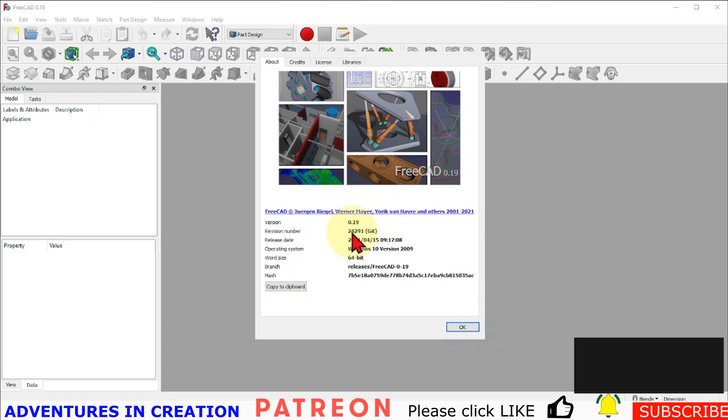So first things first, we are going to show you which version of FreeCAD we have. It's actually version 0.19.2, the very latest one downloaded. It's the GIT 24291. I just re-downloaded it just to make sure that I have the very latest. So we're going to start.

If you have my macro, my startup macro, you can certainly use that. I'm not going to use that because some people complain that they don't have it, so we're going to do it manually. So we'll click that. We start a file. I'm going to save that file. I'm going to save it as, I'm just going to call this parametric design.

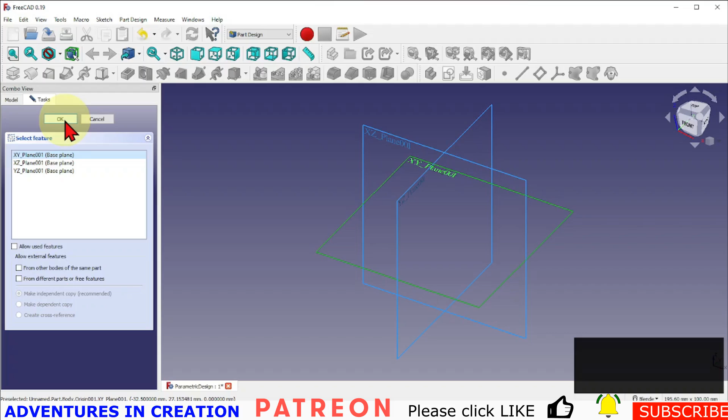You can use any plane you like and you can move it around. When you put it in the slicer, you can change it. It's entirely up to you, but that's the one I use. So if you want to follow me, use the XY plane. And then all I'm going to do is I'm going to rough out the shape. So I'm going to use this tool. This is the Polyline sketch tool. And I'm just going to sketch out roughly how this thing looks.

So it's going to be something like this. It's going to go across here, it'll go up here, there'll be a little step there, that'll come in here, and like I said, I'm just going to rough it out. And I'm going to do the same things with this that I always do. So I'm going to rough out the shape and just right click to get rid of the end of that polyline. I can drag this around a little bit if I want to, whatever we want to do.

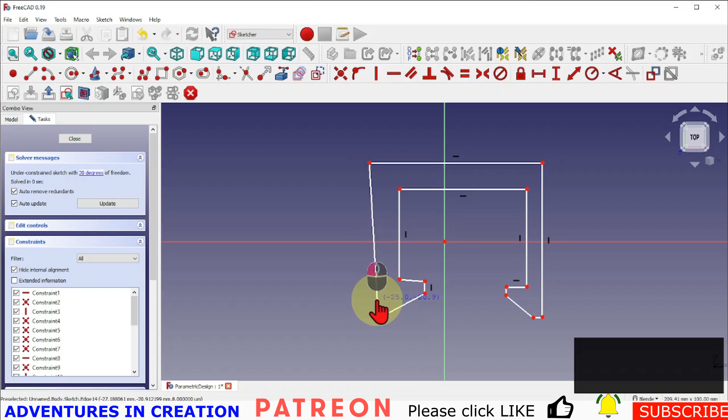Obviously, I'm going to take care of the geometry first, so I'm going to make those vertical. Actually, if I make this one and this one symmetrical around this line, and then you see when it pulls things out of shape like that, some people panic. There's no need to panic. So all we're going to do is we're going to hit that guy, make that go vertical, and then let's just move these out. We're going to say this one and this one are equal.

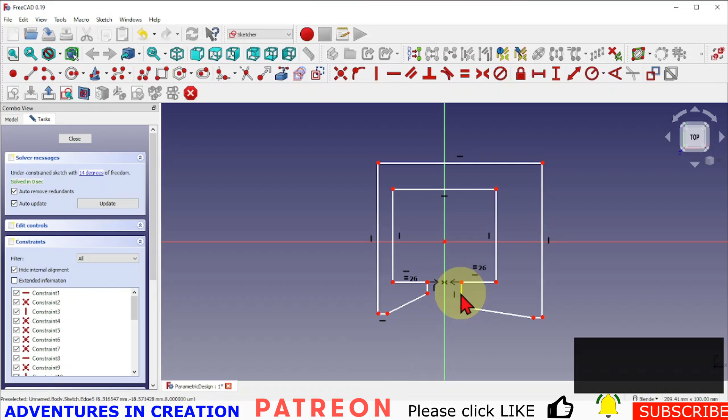And we're going to say this one is horizontal. And of course we want this one and this one to be equal. And we're going to make this one and this one be equal. And we're going to make this one and this one symmetrical. And we'll make this one and this one symmetrical. So now we have these things pretty much the same.

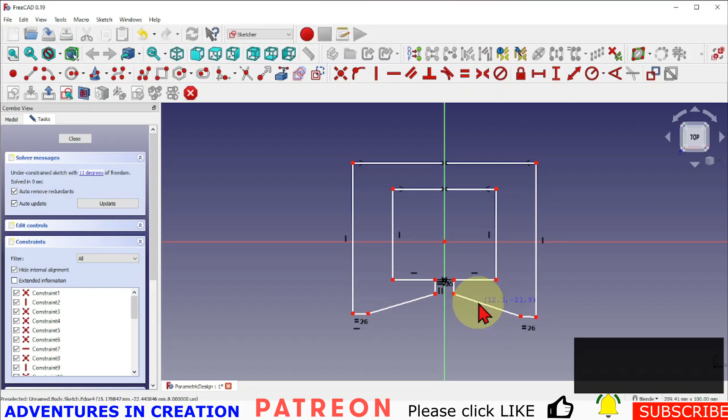So that one has to be horizontal. So once we have this shape, our geometry is pretty much locked in. Now we can start dimensioning what's important. So obviously the clip is going to hold something inside this space here. So this dimension is quite important. So we're going to take that one there and we'll give that a dimension because that's going to be important. And we're going to take that one there and give that a dimension because that's going to be important too.

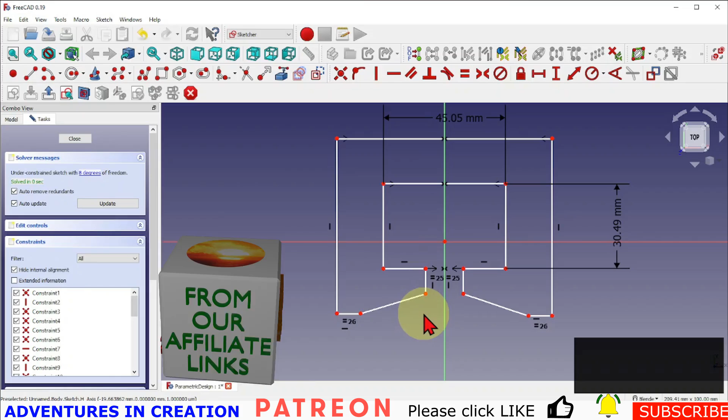Now I'm not going to actually give them numbers because remember we're going to make those parametric. So that's going to be my width and my height of whatever it is I'm holding, plus a clearance or however big you want to make the clip.

Then of course this piece here is going to be important because that's how much it's going to overhang. How much are we clipping in there? Obviously if I have something this big, I can't push it through there. I'll break this thing to try and do that. You can tell that just by the size of it. So we're going to fix that.

So what we're going to do is we're going to pick out the pieces that we need to dimension. And I think this height here is going to be important. So let's give that a dimension. And probably this one here is going to be important. So we're going to give that a dimension. And what else? So I guess the overall height and the overall width are going to be important. So we're going to give those dimensions.

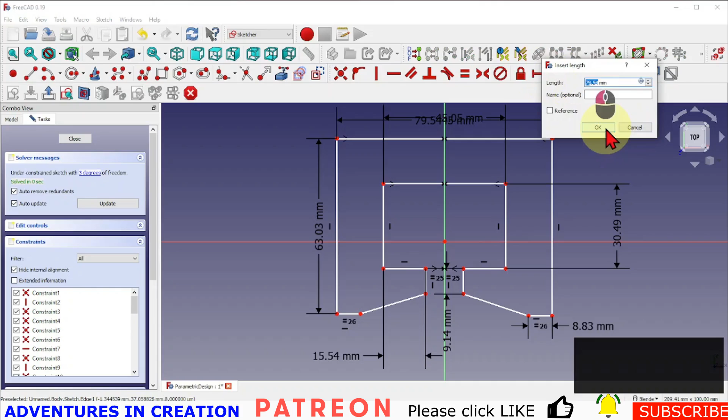And I still have 3 degrees of freedom. We want it to be a fully constrained sketch. So it's important that we constrain everything. Let's have a look at our degrees of freedom. Yep, it is showing everything is not constrained because we don't have it constrained to this guy here yet. So we want to do that. We'll move all this down.

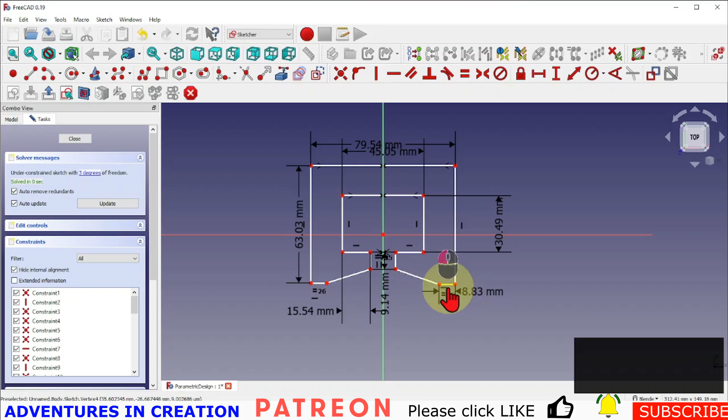I need that one and that one to be horizontally attached as well, so that they go up and down together. These go up and down together. And what we're going to do is we're going to make this and this horizontally aligned. And there you can see that piece is already attached.

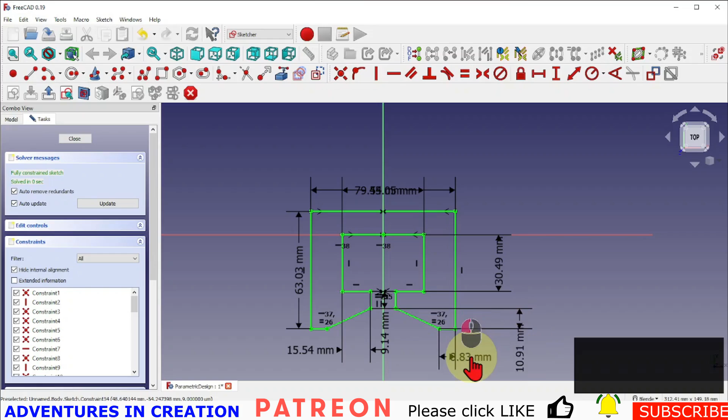Now what we need to do is just make a dimension that goes across here. So we want a dimension from here to here this way, and that will give us our fully constrained piece. I'm going to move these dimensions around so I can see them a little better. So we have a dimension that goes that way, that way, that way.

And so that gives us that overall height because we have this height and this height, just making up this piece. We have this height and we have this overall height. So I think we have enough to be able to create something parametrically from this.

All right, so now what we're going to do is we're going to say close for that. And I'm just going to pad it so we can see what the model looks like. I'll leave it at 10. This is basically the model. I'm going to put 2 holes in here, but first I'm going to put the parametrics on the outside of this to give it some reasonable dimensions. So let's do that.

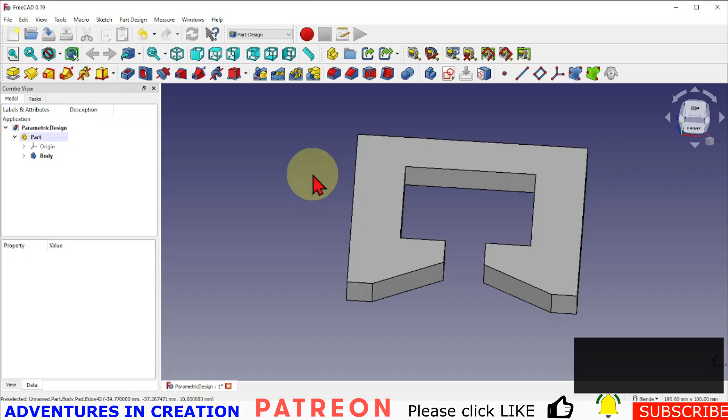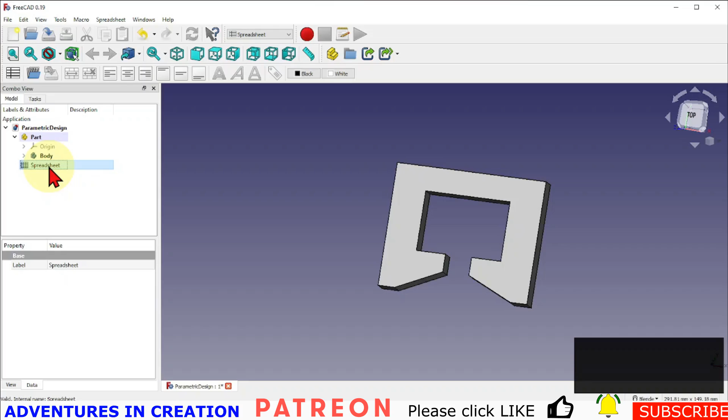And I'm just going to do it from a spreadsheet. So we could do a master sketch, but I'm not going to do a master sketch in this case. I'm going to do a spreadsheet, and we will put together the parametric data that we need to make this a parametric model. So first thing we have to do is switch workbenches to the spreadsheet workbench, create a new spreadsheet, and then we can open up that spreadsheet just by double clicking it.

And of course we can tile those two so I can see this and this. And now I'm going to go back into my sketch. So now I can see my sketch alongside my spreadsheet, and we can now put in the dimensions that we want. So what I like to do is to give dimensions some kind of descriptive name. So we're going to do that.

And I'm going to manually create the aliases. There is a macro. Again, I have a macro that does that. It's called Easy Alias. What I'm going to do is I'm going to do it manually so you can see how we do that. So the first thing I'm going to have is the overall width and the overall height. So that would be this one and this one.

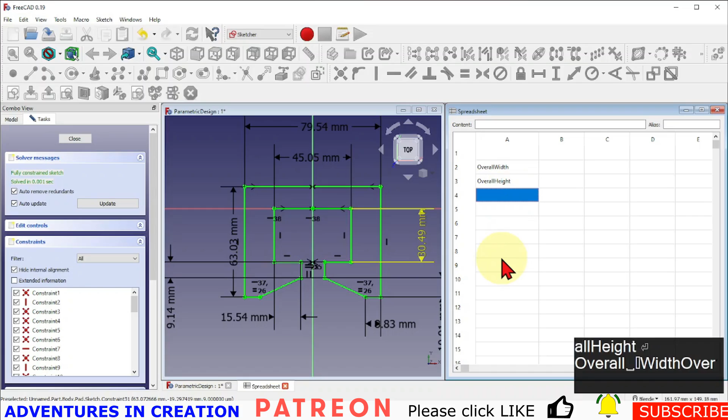And then the inside width and inside height, which are the two important ones for me. So I'm just going to call it inside width and inside height. And those two are going to be the primary drivers for everything else. If you think about it, these are two dimensions that I really care about. The outside is really just a function of the thickness around this. This overhang is a function of how much I can have it overlap, hold it in there, and not have too small of a gap here.

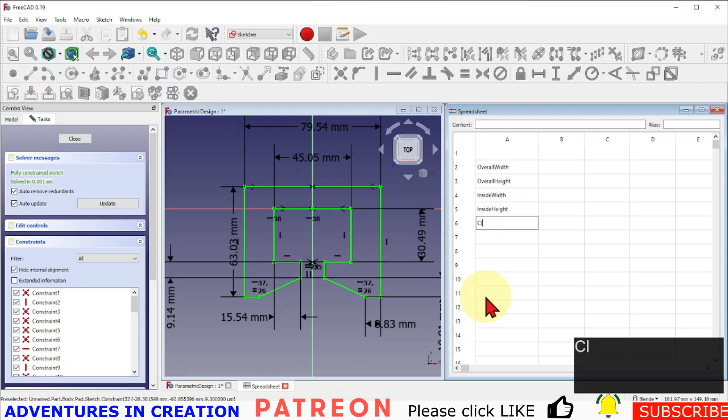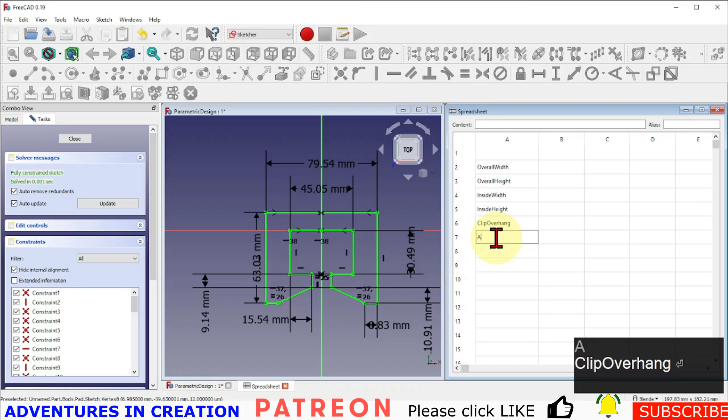The other pieces that we have, we've been calling this the overhang, so we're going to call that the clip overhang. And this dimension here, we'll call this the angle height. And again, it's up to you what you call your stuff. Whatever makes sense to you. It's not important what it is, as long as you know what those dimensions refer to.

So I'm going to call this the clip flat height. So that's the flat of the clip. This is the overhang of the clip. This is the angle height. This one and this one could probably be equal, to be honest with you. Normally when I do these type of clips, those are roughly the same height, so maybe we make those the same. And then what else do I need? I think that is it for now. So let's get started with those.

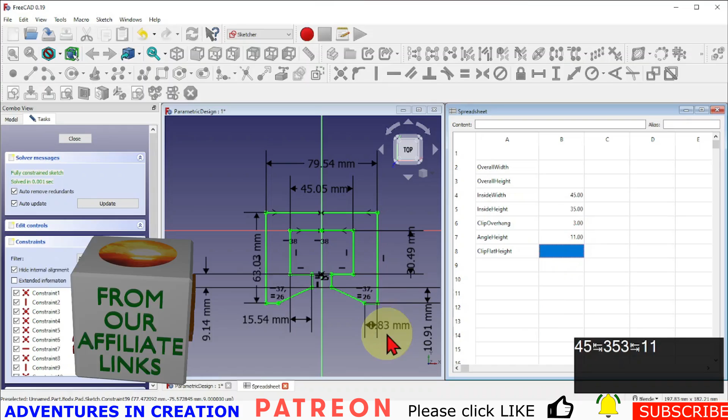So my inside width is going to be, and I'm just going to come up with a dimension, for now 45, and my inside height, I'm going to make it 35. And my clip overhang probably only needs to be about 3. My angle height is currently 10, so let's go with 11. And my flat height in this particular instance is 9. And again, I'm just picking dimensions just to be able to assign them.

And now if I look at my overall height, it is actually my inside height plus my clip flat height, my angle height, and then whatever that thickness is going to be. I can make that thickness the difference between this and this divided by 2. That would keep a constant thickness all the way around. So let's try and express that as a calculation. As with all spreadsheets, you just say equals.

And it's going to be the inside height, which is B5. So B here, 5 here is this number. And then I'm going to add the angle height, which is B7, and the clip flat height, which is B8. Plus, it's going to be the inside width, actually the overall width, so B2. I'm going to put this in parens: B2 minus inside width, which is B4, divided by 2.

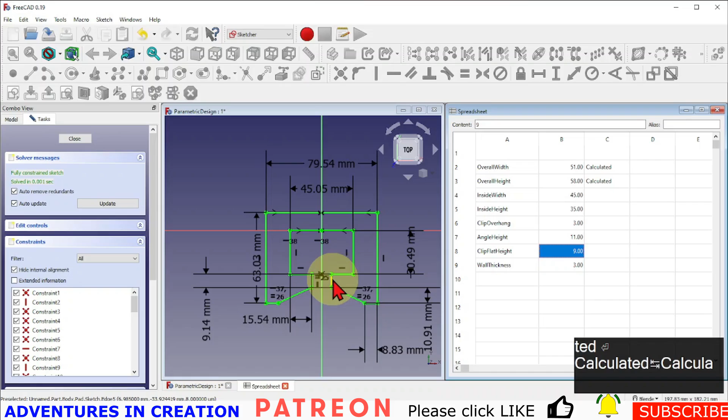This clip overhang, can we calculate that? Let's have a think about that. I don't think we can. I think we're going to leave that one. The angle height, we're going to leave that one. The clip flat height, we'll leave that one for now. So I think we're ready to assign some things here. So what we're going to do is we'll click on that. We'll go to this where it says alias on the right hand side. And I'm just going to give it the same name as this. So overall width.

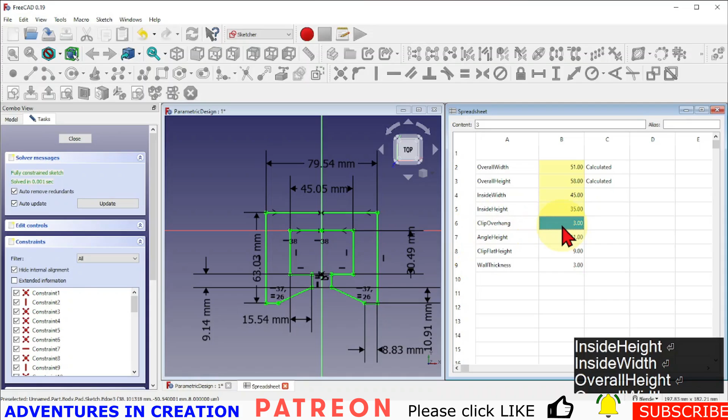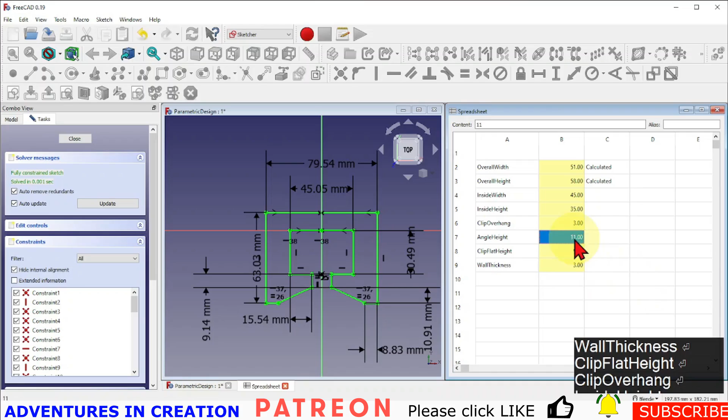I'm going to do the same for this one. Overall height. And inside width. Inside height. Now the easy alias, if you select that, it will automatically give it those names, but I'm doing it manually so you can see how to do it. Clip overhang. So I just select the number and I'm going to type in whatever's there. Clip flat height. And wall thickness. I did do 2 S's. Oh, I missed off angle height, so I got to do that one.

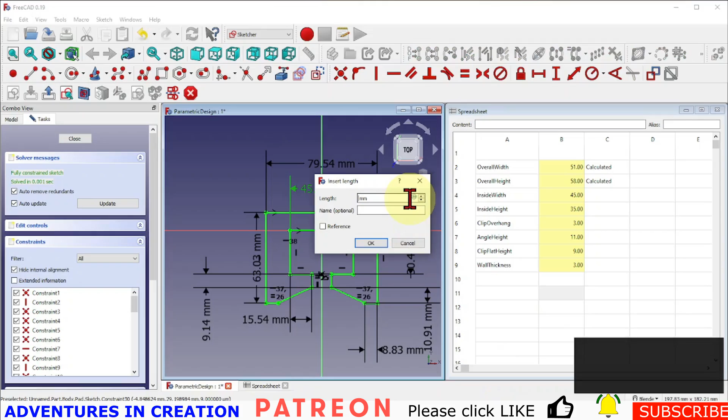And that gives them all names, so that has the same name as what's in here. So I can easily see when I go through these which one's which. And now it's just a matter of assigning them to here. So if I go here, double click that, then I click on this little guy here. So let's see, can I zoom into there? Wait. Okay, let's try it again. I'll just zoom in there. There you go. So you see this little guy here.

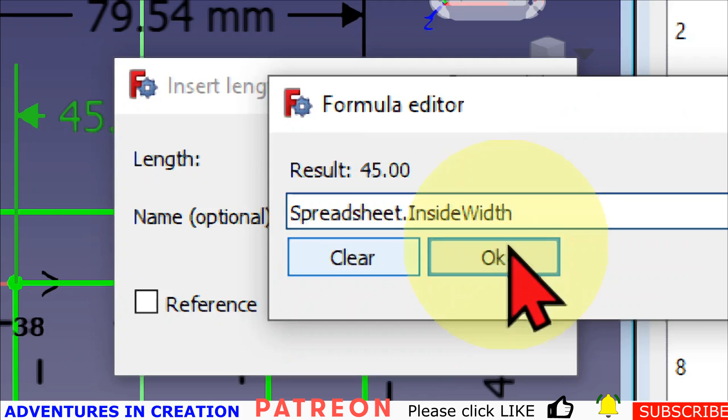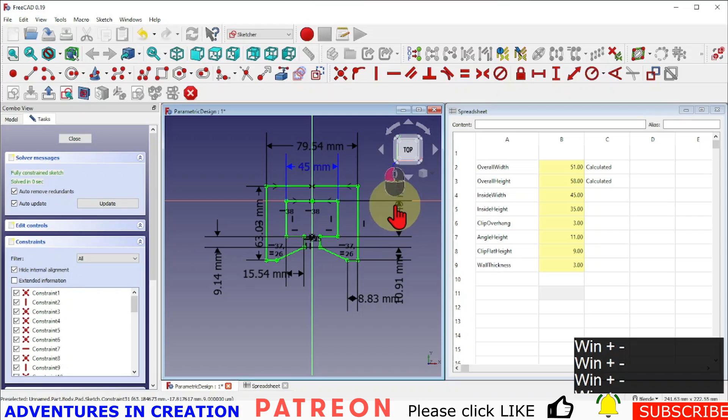Now if I click that, it'll let me say spreadsheet, and then I'm gonna give it this inside width. You can see it automatically tells me the result. I say okay, click okay there, and now I'll just zoom back out. So now you can see that it's turned blue, which basically means it has been assigned a dimension. So it is now whatever this dimension is. And we're going to carry on.

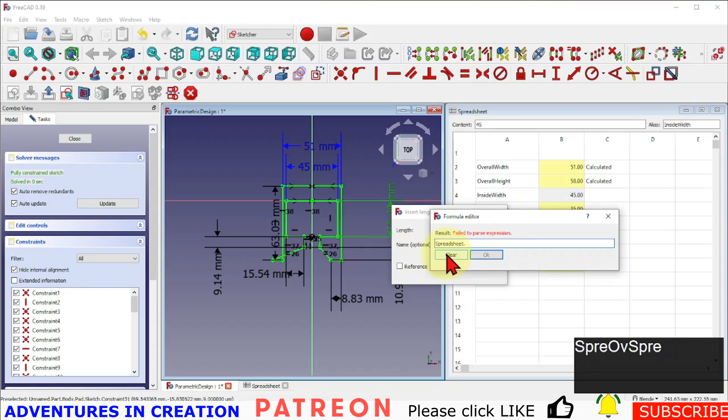So this one's going to be the overall width. So I double click it, hit that little strange guy again, spreadsheet, overall width, and you can see it's already changing to the things that we have set. And I'm going to change this one, double click, that guy, spreadsheet, inside, and this one's inside height. And then I'm going to change.

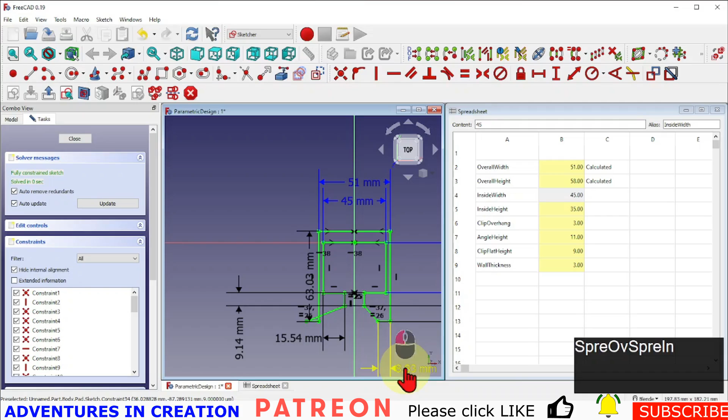Now, one thing to notice, you see how this thing is turned inside out? That's not a great thing to happen. So to fix that, I might have to mess with some of the dimensions here. I might have to delete a dimension or something like that to get that to work again. So I'm going to assign this one spreadsheet, and it's clip flat height. And this one is going to be the same thing. So I made those equal.

And somebody asked me, can I have more than one body reference these dimensions? And yes, you can, because the spreadsheet is accessible to everybody. So clip flat height. Say okay. And now that's 9. This guy is the same as this guy, but for some reason we are flipped. So we're going to have to fix that, and I'll show you how. Actually, it's not a bad thing that that's happened, because that will let me show you how I fix it.

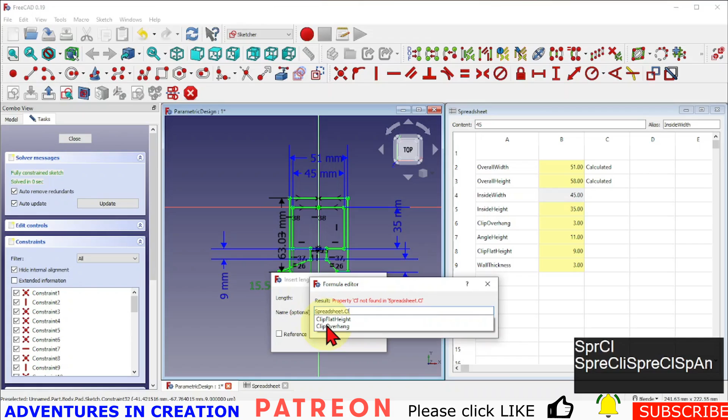So we're going here, spreadsheet, and that's going to be angle height. And then this one is going to be clip overhang. So spreadsheet, clip overhang. And this one is going to be spreadsheet, overall height.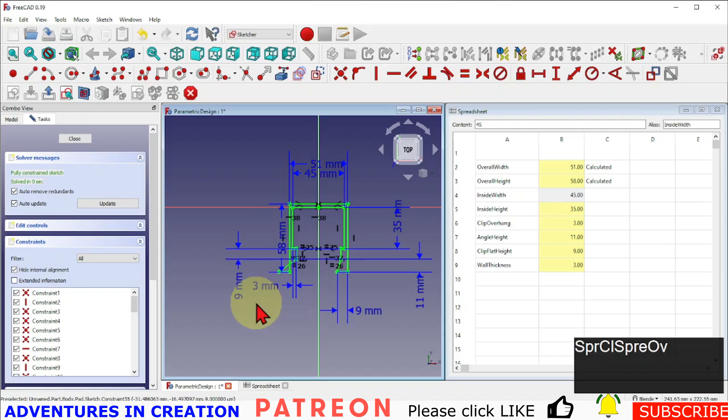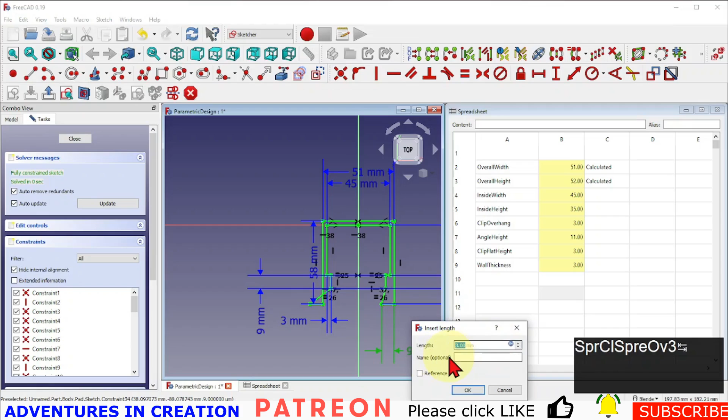And there we have it. So now I have a 3mm thickness there. You can see that things are not lining up the way I'd want them to. So clearly this clip flat height shouldn't be as big as it is. So if I change that, we'll see here that this is updated. I thought this was clip flat height as well. Let me just double check. So if you want to see which ones they are, it is, but it hasn't updated.

There we go. And now if I look at my model, I can see that there are some issues, and I can see that maybe I need to make some things proportional. In doing so, it'll mean that these things will calculate themselves. So I'm looking at that right now. Like I said, I haven't done this yet, so we're doing this together, so I can show you how I do it. And I do have to fix this. Why would this go inside out? It's because it flipped inside out before the dimension was applied.

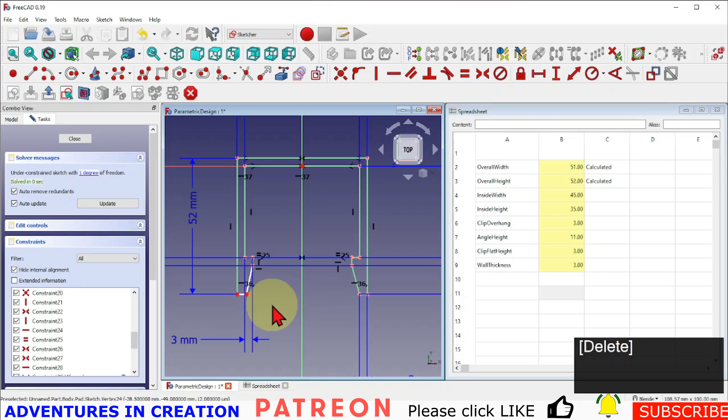So what I'm going to do is break this constraint here, number 26. So I go down on this left side and I turn off 26. That should not be holding anymore. Actually, I'm going to delete it. There we go. So it didn't update for some reason. Now I can turn that back to where it needs to go.

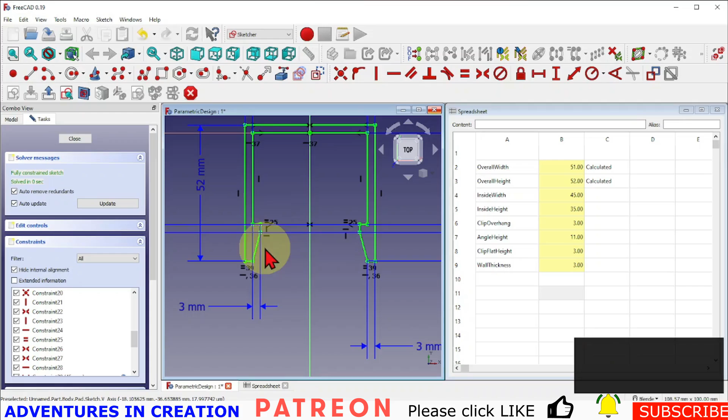So that is now, I can add that back in, I think. Just add that back in and we should be good. That was just an equal constraint. And now it's back in the right way. But we can see that we need to do some things here to make this different. So my overhang should maybe be 5 in this case.

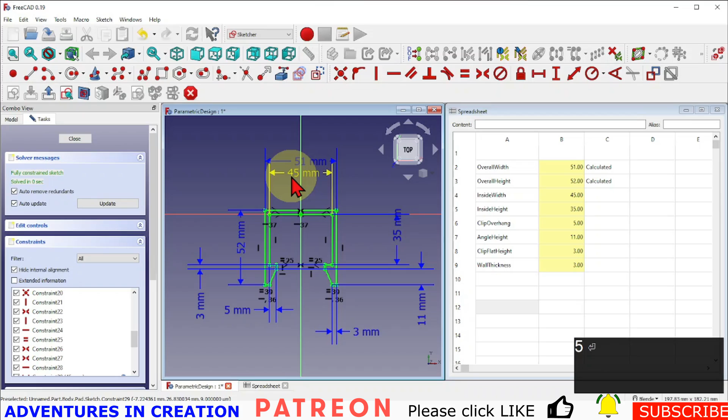And you can see sometimes it's not updating. So if I double click on the dimension to edit that, you see it is already 5. And when I say okay, now it will update. So that's kind of weird. So probably what we want to do is make this clip overhang proportional to this inside dimension. So I'm looking at it to see, is 5 enough? Do I want to go more than 5? And give me an idea of what the proportion should be. Right now that inside is 45.

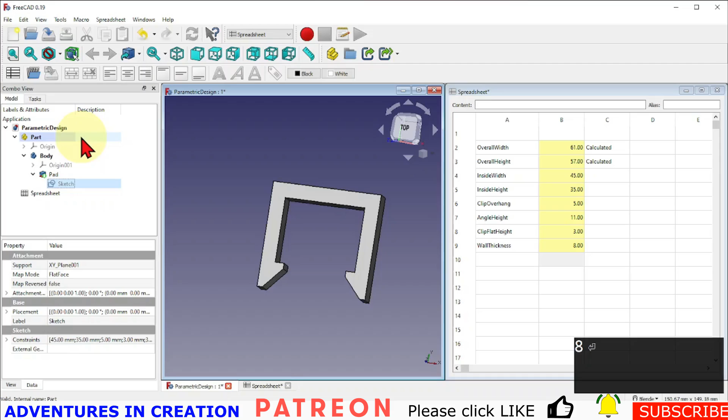And we're also only 3 in our wall thickness. So let's make that 8, just to give it what we need here. And so everything updated in our spreadsheet. And what I'm going to do is just save everything. Save my parametric design. I'm doing that because I want to make sure that I don't lose anything with the changes here. I close my sketch, reopen my sketch, and now all my dimensions are correct.

So now it's starting to look a little bit more proportional, a little bit more the way I want it to be, with an 8 wall thickness. So again, we could make that a calculation and use it as a proportion. I'm thinking out loud. I'm doing this with you right now. I have not already done this, so I'm considering the design as we go, so you can see how I think about it. I don't mind that these are the same. I think that's pretty good. I think this needs to be a proportion of this thickness though. And right now it's just under half of that.

So if I say that's 4, again, I'm just looking at what it looks like proportionally. If I make that 4, it makes everything 4. So if I make that half of that, I'm now going to say this one equals the wall thickness divided by 2. So that's B9 divided by 2. So now whatever the wall thickness is, and I'm going to put my Calculated alongside here, my clip flat height is going to be half of that. So I think that is good.

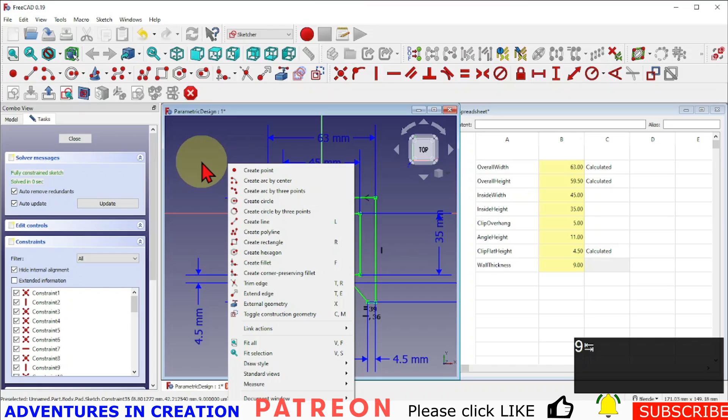I'll come back. Okay, so working through our dimensions then, I think this wall thickness could actually be calculated based on what looks about right. I have 1/5 of this inside width is my wall thickness. So let's try that, we'll change the dimensions around and see what it looks like. So my wall thickness is B4 divided by 5. And I'm going to make this calculated.

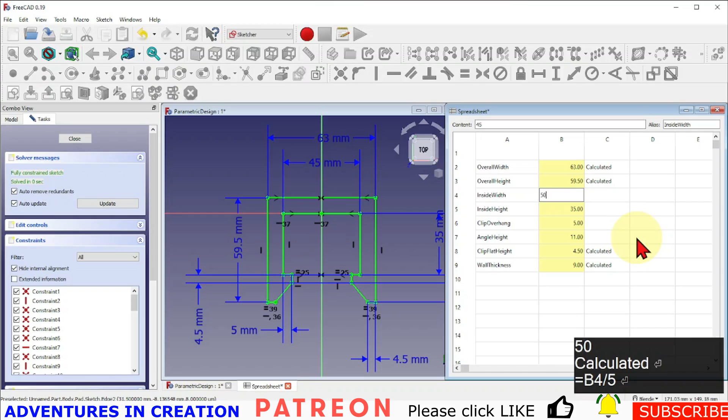So now if I change my inside width to 50, I'll make that wall thickness 10. I still don't know why my dimensions are not updating themselves. I did look at the settings, I couldn't find anything. I'm not sure why it's not updating as I'm changing them here. So now if you look at, it's automatically making that wall thickness. So all I'm doing is setting my inside width and my inside height and my clip overhang and my angle height. And now if I change my angle height,

I think my angle height there is a little bit extreme. So I'm going to have a quick look. See, we have 11 millimeters right now. I change that to, let's go to 9. Just going to do a save again. I just want to save everything, make sure I don't lose it. You should be saving stuff regularly.

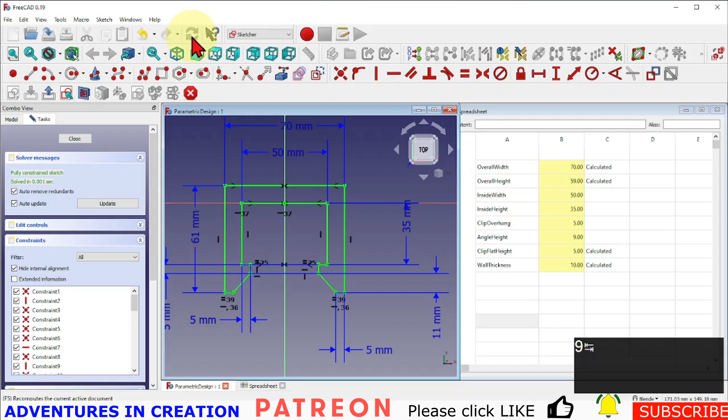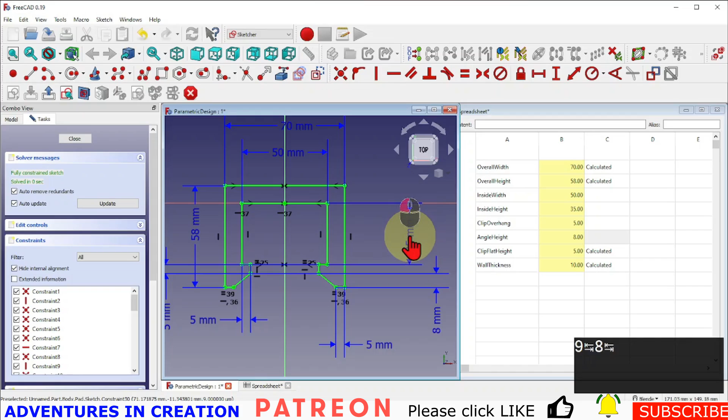Normally I would say there would be a recompute that would allow that to change, but I don't know why it's not. I don't know if it's just this particular session, but it's not changing. And I think I'm going to even go smaller than that. I might go 8. I think that looks a bit better. And if I look at this dimension, so as a proportion, we could say 40, just to see how that looks. Everything should be able to update there. So I think that looks good.

If I make that 1/5 of that, so I'm going to do the same for that. So that's going to be my inside height, B5 divided by 5. Oops. We have to say equals B5 divided by 5. There we go. I'm going to call that calculated.

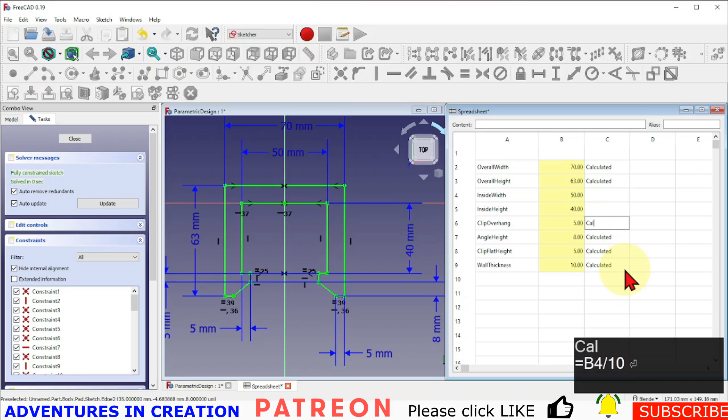So now if I change just these two, I'm changing everything except the clip overhang. So I think I want to go with the clip overhang too, and that is 50 to 5, so it's 1/10 of that. So let's make the clip overhang equal B4 divided by 10. And now that's calculated. So you can see how it came about, my calculations here to be able to make everything parametric except these two pieces that I want to set up.

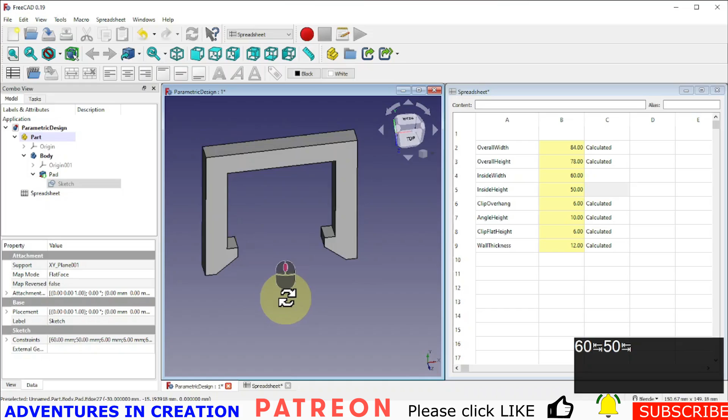So what I'm going to do is I'm going to save that right now. Save my design. And now I'm going to just make my design my model and take a look at it. And now, one more time, I'm going to tile my windows, and I'm going to change this inside width to be 60. And I'm going to change my inside height to be 50. And there you can see it's fully parametric. Everything is changing based on my inside height and inside width.

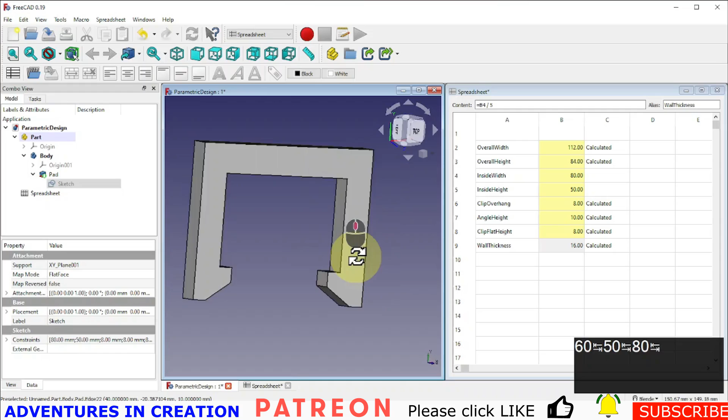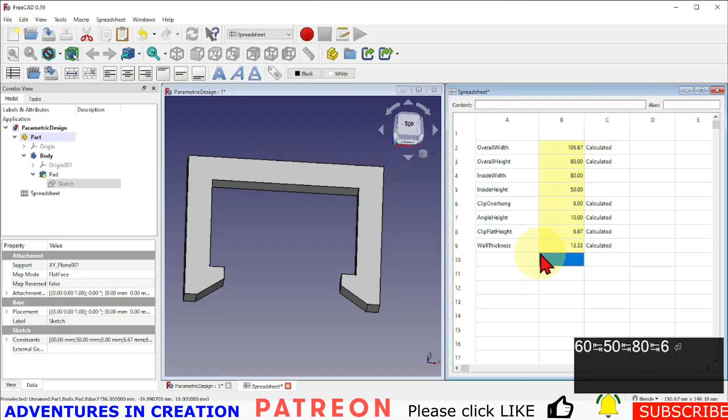And my wall thickness now is 12. I don't know if that's going to be too thick for what I need. So I might change that calculation. So let's go with 80 for my inside width. Yeah, now I'm getting too thick. So I don't like that calculation. So it's 1/5 of my inside width. And I think it could be smaller. Let's go 1/6 of my inside width. Maybe 1/8 my inside width. Yeah, that's probably better.

So that is 10, and we know this is 10 because that's what we originally set it up to be. However, we could make our height there, what do we call that? Our extruded height, and we could make that a calculation based on our wall thickness. So we could say maybe we want it to be 1.5 times our wall thickness, so B9 times 1.5.

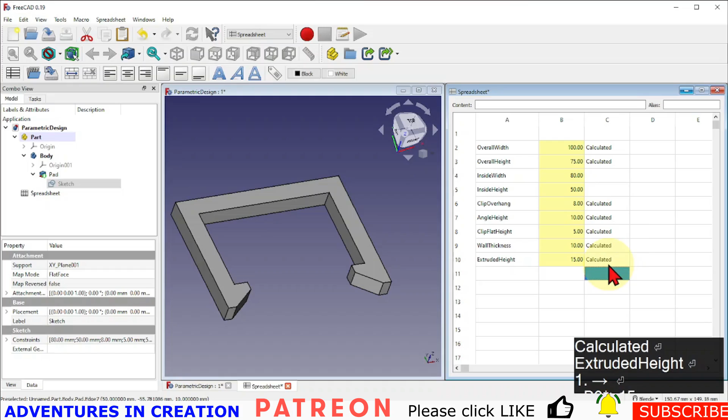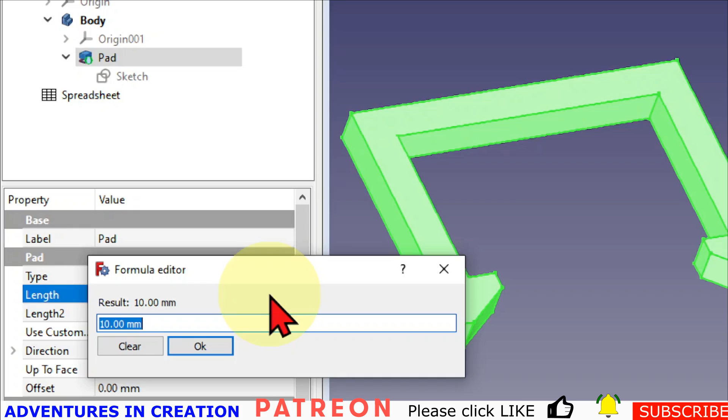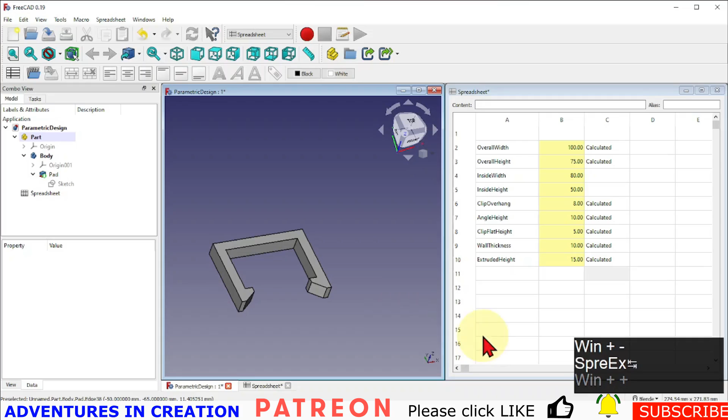So let's go over there a little bit. So where we have our length of 10, we hit this, and we say it's equal to spreadsheet extruded height, and just tab away from that. And now we have that all parametric too. So I like that so far. So I'm going to save everything. And then we'll look at putting holes in.

So now what we want to do is we're going to add 2 holes in here. We want to make those parametric too, so they're proportional to the size of our clip. So I'm going to do that. We're going to go back into part design, and we're going to create a new sketch. And this time we want it to be on this plane here, the XZ plane. Say OK. I'll go over here, turn my model back on so I can see what I'm doing there.

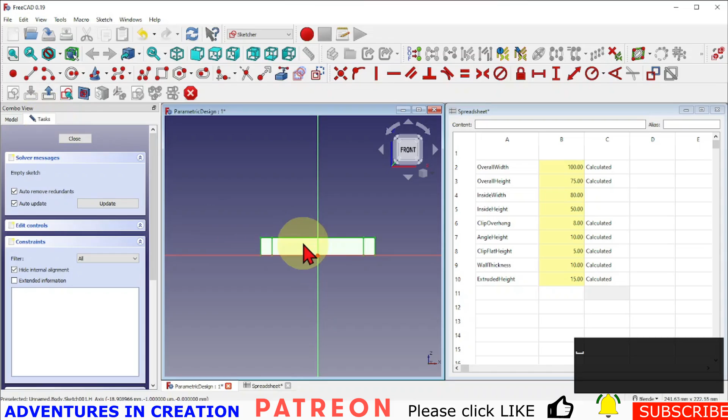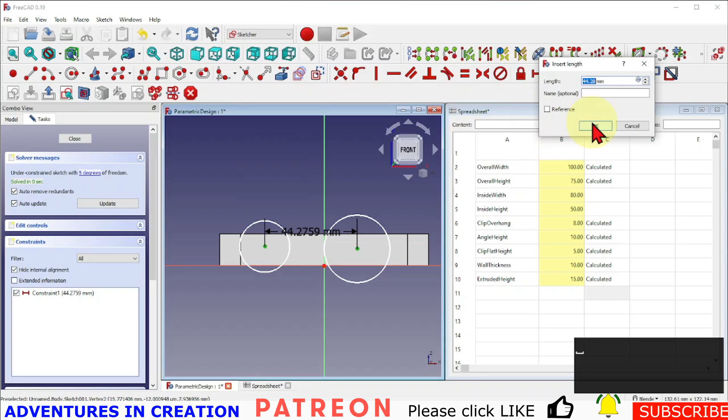And we'll just zoom in here. We're actually just going to put 2 holes in. So I'm just going to take this, pop 2 holes in here. Doesn't matter where they go for now. Remember, everything's parametric, so it really doesn't matter where we put them to start with. We know there's going to be a dimension between the 2 of them. We know that this one and this one are going to be equal.

We know that this one and this are going to be symmetrical. And then we want a diameter on one of these. Again, it doesn't matter what we put there for now because we're going to make it parametric. And then we just need to align it from this point up. It has to have an alignment that way.

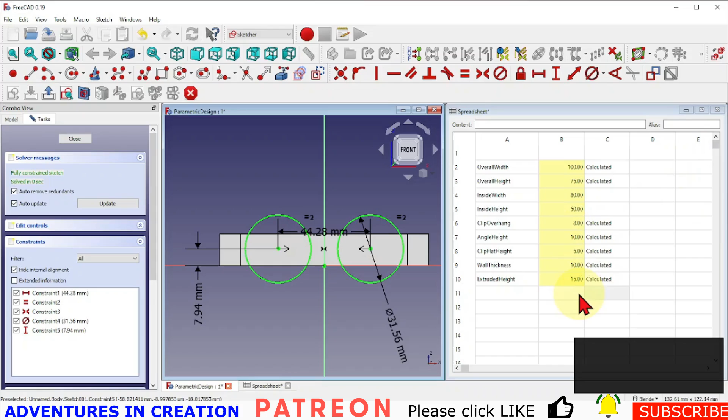And there we go. So now in our spreadsheet, we can leave a gap here and we'll just put in hole diameter. That's going to be our first one. And then we're going to say hole centers. And then we'll say hole middle, which is going to be this dimension here, the hole middle.

So my hole diameter, I don't know, we're going to start with 4. My hole centers are going to be 44, and my hole middle is going to be 8. We'll just start out with something just to get going. And so I'm going to call this hole diameter. I'm going to call this one hole center. And I'm going to call this one hole middle. So again, I'm assigning these manually. You can do it with that easy alias.

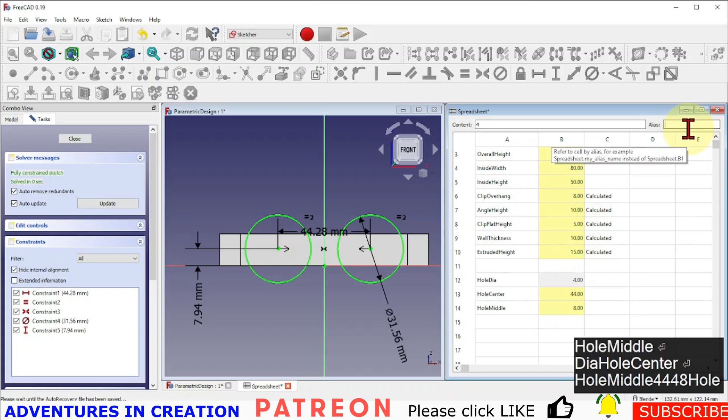It would be fine. So it looks like I didn't get hole diameter in there. Do that again. There we go. If it doesn't go yellow, it hasn't been assigned. So you can always click on it. You can see what the alias is, and you can see what the number is there.

So for my hole diameter, I probably want to do some relation to my extruded height. So extruded height divided by 3 maybe would be a good one. So let's do that just to get roughly what we want. So that's going to be B10 divided by 3. And then my hole centers. So now I need to be careful that my hole centers are not stuck under that clip. So we're going to have to think about that one a little bit.

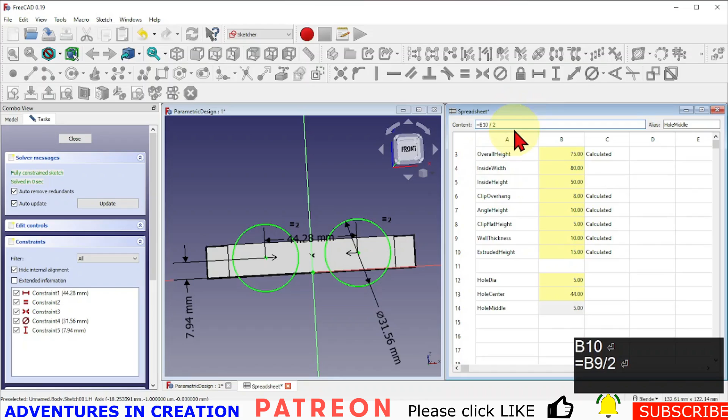Let's go with our hole middle because that one's easy. So the hole middle is going to be half of that wall thickness. So we're going to say equals, and that wall thickness is B9. So B9 divided by 2. And so that'll put us right in the middle of that. Oh no, I'm sorry, it's not B9, it's B10. It's not the wall thickness, it's the extruded height. B10 divided by 2. There we go.

So now that will be exactly where we want it to be in terms of the center here, and my hole size is there. So let's go ahead and assign those. So we're going to go in here. We're going to call this spreadsheet hole diameter.

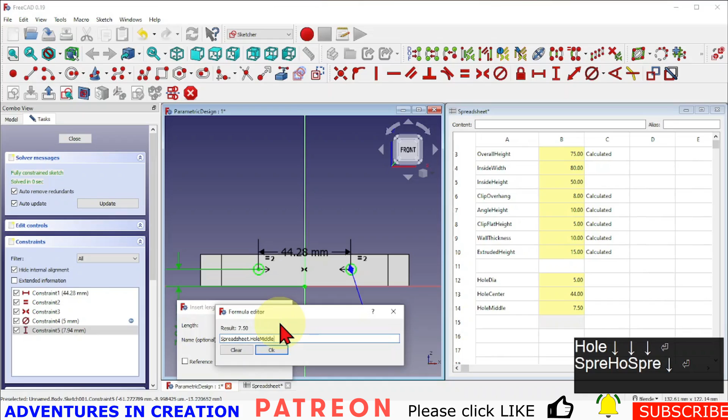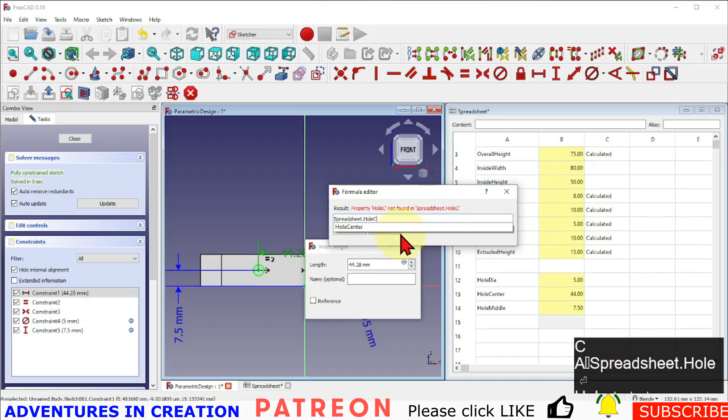And we're going to call this spreadsheet hole middle. And we're going to call this one spreadsheet hole center. And we are done. And you can see they're already constrained. It's fully constrained. So we're going to close that.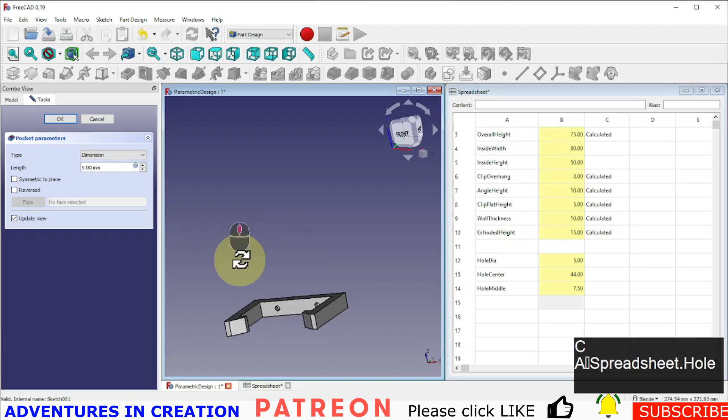And then we're going to make that a pocket. And our pocket we can say through all. And I'll go right through there. That's perfect. And all looks good at the moment. So my hole diameter is a calculation, so we can put that in as calculated. My hole middle is a calculation, so we can put that in as calculated.

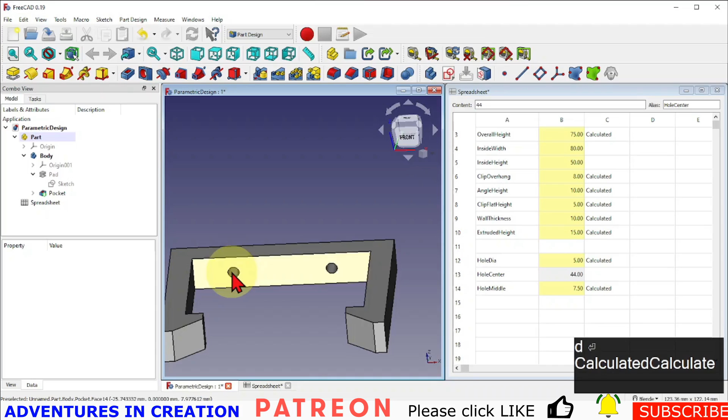And my hole center, now we have to think about what my hole center should be. So I want it to be this distance, which is my inside width, minus this distance, which is my overhang. So that would put it right there. And then it's got to be minus some clearance. So if we said minus 2 times the hole diameter, I think we'd be good.

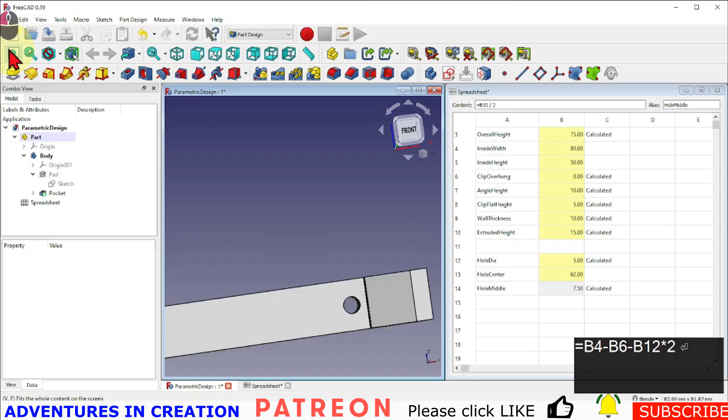So let's try that. Let's say it equals my inside width, which is B4, minus my overhang, which is B6, minus my hole diameter, which is B12, times 2. Let's see how that looks. I just need to pop that way and go front on. Yeah, not quite right. So let's have a look.

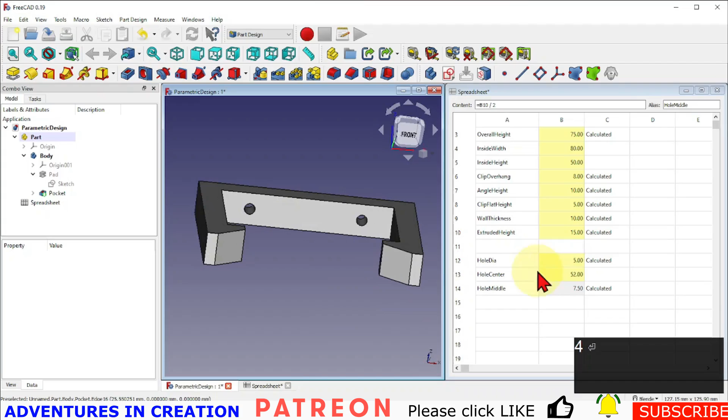So I'm this and this. Oh, it should be times 4, I think. There we go. So now the holes don't overlap here ever. So we can put that in as calculated. And let's try it for some different widths. Let's go to 50. Go to 90. Oh, looks good. So I believe we have it.

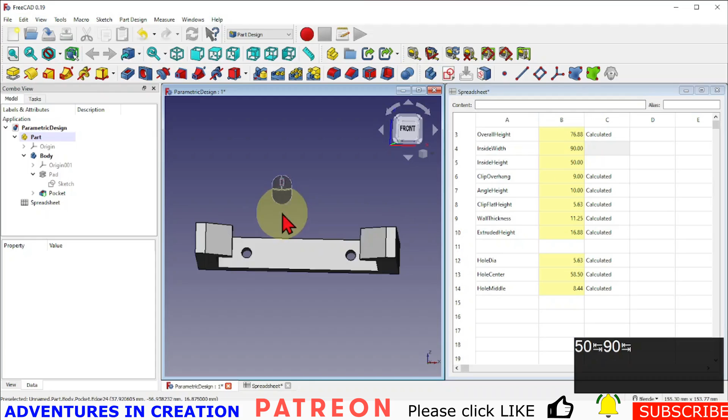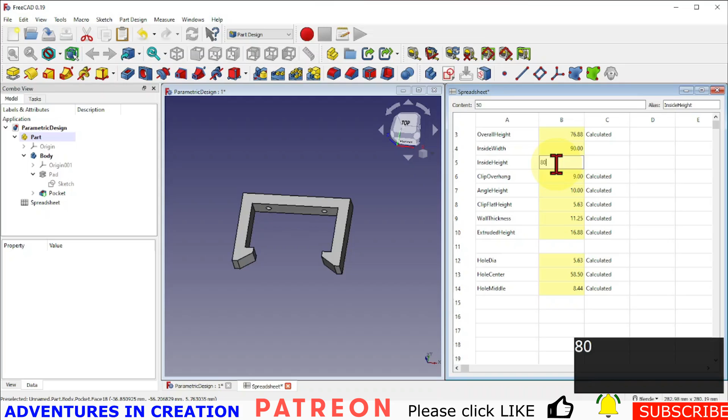And my hole diameter is a function of that, so I can put bigger screws in as I go wider. Yeah, it all looks good. I think I'm okay with that. And again, it's just how you calculate it. I was just looking at the hole diameter, and the hole diameter is a function of this extruded height, but the extruded height is a function of this wall thickness. And the wall thickness is a function of how big my inside width is. So it all changes based on the inside width. It shouldn't change based on the inside height. It stays the same.

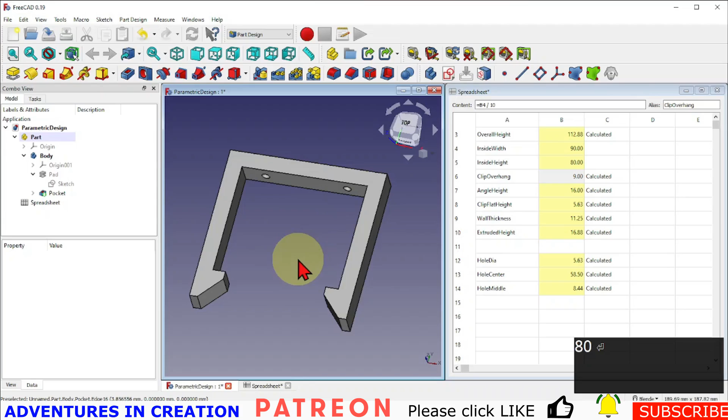And now I think the proof is to actually print one and see what it looks like. So I'm going to go out and measure my plug, and then I'm going to come back in and print one and see if it'll work. So a quick measure of my part, and it looks like it's going to be 50 high by 40 wide. So my inside width is going to be 40 and my height is going to be 50.

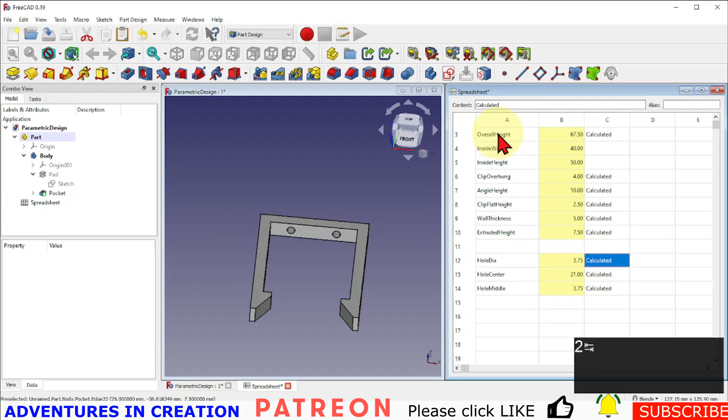And that makes my hole diameter quite small. I might have to increase that because I'm not sure I have any screws that small. 50 by 40. I'm only 7 millimeters high. That's not bad. I kind of like this to be 4 though. What about if I divide that by 2 in this case? Yeah, that would look better. Well, let's go ahead and we'll print one, see what it looks like.

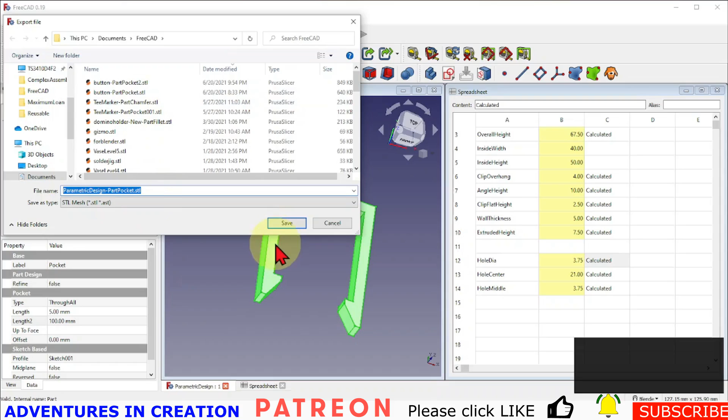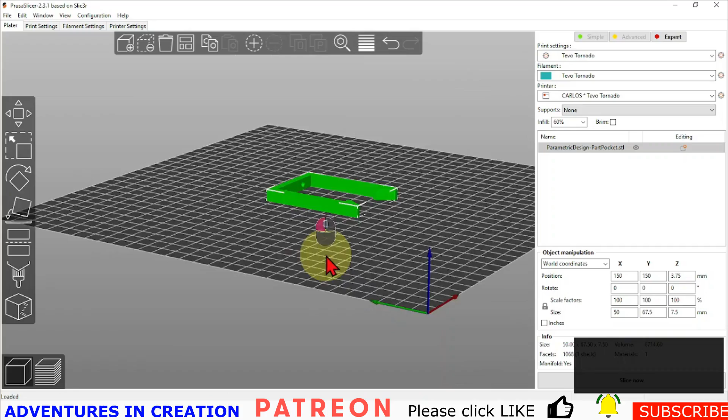So to print it, I'm going to take that pocket, left click it, and file and export. Now I'm going to export it as that. Then I'm going to open that up in my slicer. I'll show you how I do that real quick. So I use the Prusa slicer, and I'm just going to file, import, import an STL, and I'll just zoom in a little bit. Everything looks good. That's exactly the way we want it to print.

So I'll give it a slice, and looks like it's going to take 33 minutes to print. Let me just check. I think my infill's pretty solid on this one. 60% infill. I think that's probably good because it's a clip and I don't want it to break. I'm going to send that to my printer. Let's just get it going. So we just send this to the printer and away we go.